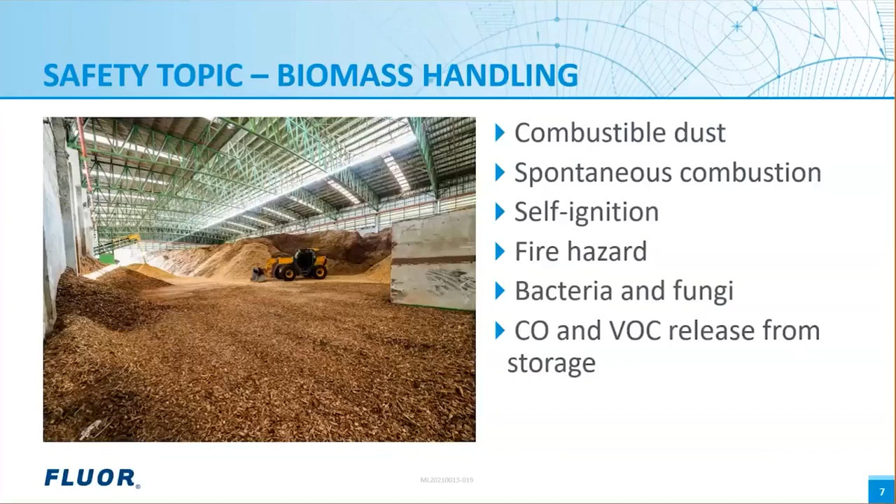Other safety concerns with biomass handling include the potential growth of bacteria and fungi on some types of biomass, and the release of VOCs when the biomass is stored, which all present health and safety hazards to any workers in the area. Proper air circulation is therefore extremely important. These safety concerns need to be kept in mind throughout the entire process of the biomass handling system design.

All right, moving on to our main presentation. We'll start our presentation today with a discussion of the need for biomass gasification, including the need for waste utilization and renewable fuels. We'll also look at how gasification compares to other processes, give a more in-depth look at types of gasifiers, and end with a look at considerations for the balance of plant design. I'll start with the need for waste utilization and renewable fuels.

However, before we get too far into details, I want to define some terms for anyone who is less familiar with gasification technology. Gasification, at the most basic level, is a process which converts carbon-based fuels into a vapor comprised mainly of hydrogen, carbon monoxide, and carbon dioxide. In biomass gasification, the feedstock can be any of a number of types of biomass, including municipal solid waste or MSW, refuse-derived fuels or RDF, wood products, or waste tires. The main vapor product from the gasifier is called synthesis gas, or syngas, and unlike combustion products, retains much of the heating value from the feedstock.

Syngas is then further processed and converted into useful products such as heat and power or chemicals, including hydrogen, methanol, and Fischer-Tropsch liquids. Before we get any further into the technical details of gasification and how it works, I want to first discuss why and when it is needed.

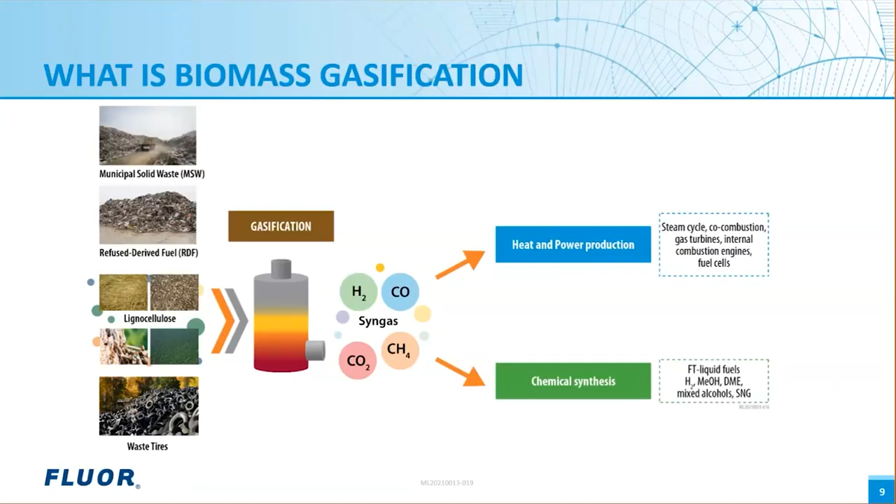The ability to utilize waste as a feed for gasification is important given the extremely high waste production rates worldwide. Global annual municipal solid waste production is currently at over 2 billion tons per year and is still growing, with a predicted waste production of 3.4 billion tons per year by 2050.

Waste production varies significantly across the world, ranging from about 0.1 to 4.5 kilograms per person per day. Highly urbanized countries generally produce more municipal waste. The map on the left shows a breakdown of the estimated waste generation per person, with countries in orange like the United States, Canada, and Australia having the highest waste production on a per capita basis.

In addition to municipal waste generation, other types of waste are also produced in large quantities. For example, industrial waste is at a global average of nearly 13 kilograms per capita per day. Agricultural waste accounts for another 3 kilograms per capita per day, and construction and demolition waste for another 1.7 kilograms per capita per day.

All of this waste has to go somewhere, and unfortunately, about 70% worldwide, on average, currently goes to landfills or open dumps. While recycling and composting are becoming more common, they still only account for less than 20% of waste treatment.

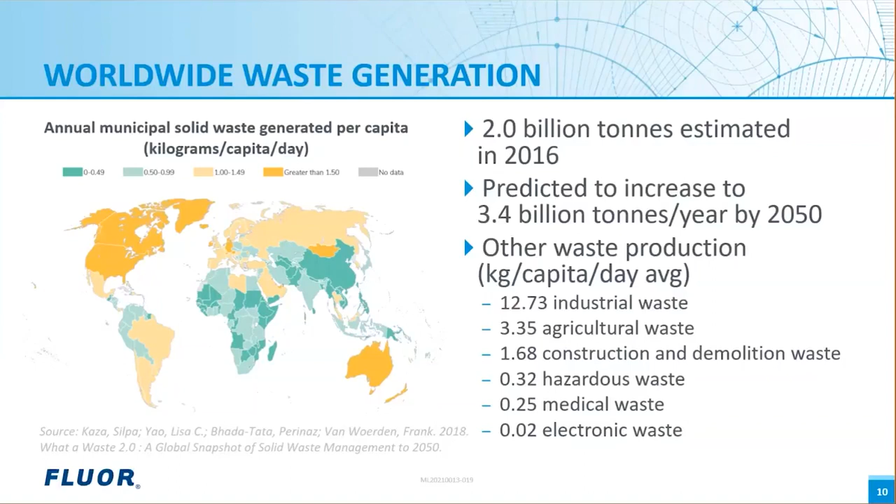Let's look at the United States in particular as an example of waste generation. In the United States, total MSW generation, which is shown on the graph on the left, was just under 300 million tons in 2018. Of that, about half was sent to landfills, and the amount to landfills is shown on the right.

Many current conservation efforts are focused on increasing recycling and reuse. The increase in recycling is what has allowed the total landfill tonnage to remain fairly stagnant while the total MSW production grows. However, at 150 million tons per year, there is still plenty of waste going to landfills, and there is clearly a need for additional waste utilization beyond recycling.

Gasification can help fill this gap. In addition to being a waste of resources, literally, landfill usage is also a concern because the amount of MSW produced in the United States is high enough that some regional landfills are filling up. Because space is often at a premium, other landfills charge a fee, called a tipping fee, to deposit waste there.

When other uses, like biomass gasification, are found for the waste, this tipping fee is often available as a revenue stream or saved cost.

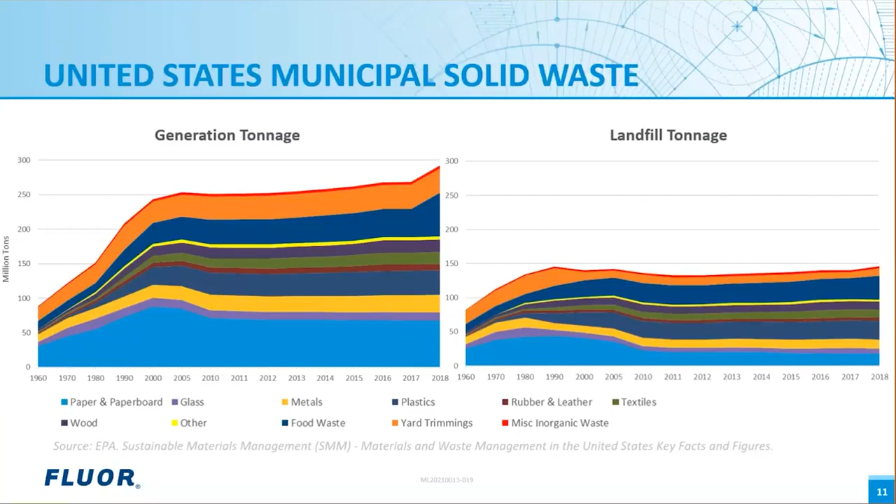The other major concern with sending waste to landfills is the resulting emissions. As MSW decomposes, it emits significant amounts of methane, which, on a pound-for-pound basis, has an impact 25 times that of CO2. In 2018, U.S. landfill emissions were equivalent to more than 110 million metric tons of CO2.

To put that in perspective, that's equivalent to the greenhouse gas emissions that would come from 20 million passenger vehicles over just 1 year. This puts MSW emissions in the United States as the third largest source of human-related methane emissions.

In addition, as you can see from the map, as you'd likely expect, the most significant landfill emissions are in areas with the highest urbanization. These are also generally the same areas that have other air quality and pollution concerns already.

To combat greenhouse gas emissions and pollution, many U.S. states and other countries have enacted limits on CO2 or methane emissions. Many places use a cap-and-trade system, which limits CO2 emissions while effectively putting a value on saved emissions. Utilizing waste as a feed for gasification that is otherwise destined for the landfill may qualify for these or other credits, particularly when carbon capture is employed in addition to gasification.

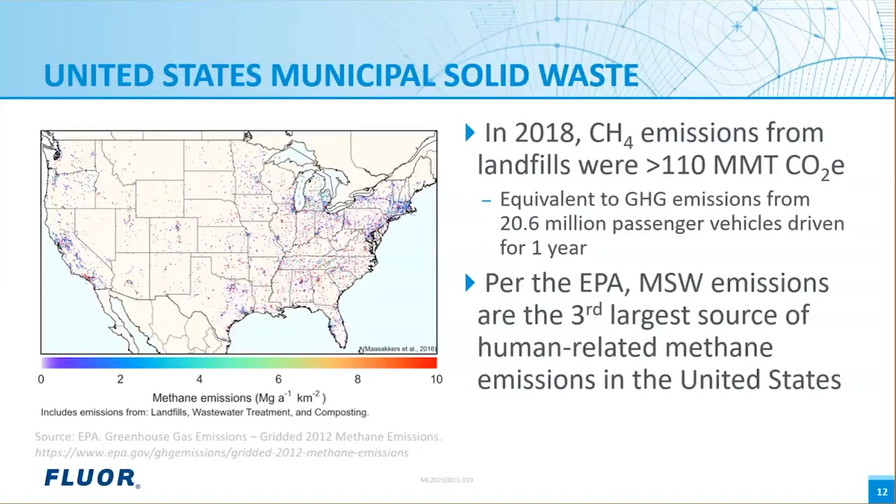Clearly, biomass gasification is useful because the feed can be waste streams that would otherwise be discarded. On the product side, biomass gasification can also provide significant benefits since the products can be considered green or renewable, depending on the feedstock and plant location.

If the product is a fuel, such as hydrogen, Fischer-Tropsch liquids, or even electricity, it can be classified as a renewable fuel. This is valuable for two reasons. It helps meet local renewable energy goals by producing low carbon intensity products, and it helps the project because additional revenue streams in the form of credits are often available.

Renewable and green products are particularly valuable in places like California that have high targets for renewable fuel and electricity generation. California has a goal of 60% renewable energy on their grid by 2030 and 100% by 2045. To put that in perspective, currently only about a third of the electricity in California is from renewable energy, about 6% of which is from biomass.

On the fuel side, California has announced that all new passenger cars sold in the state should be zero emissions vehicles, such as those run on hydrogen or electricity, by 2035. And although California already has a significant renewable energy infrastructure, there's still a ways to go to meet these targets.

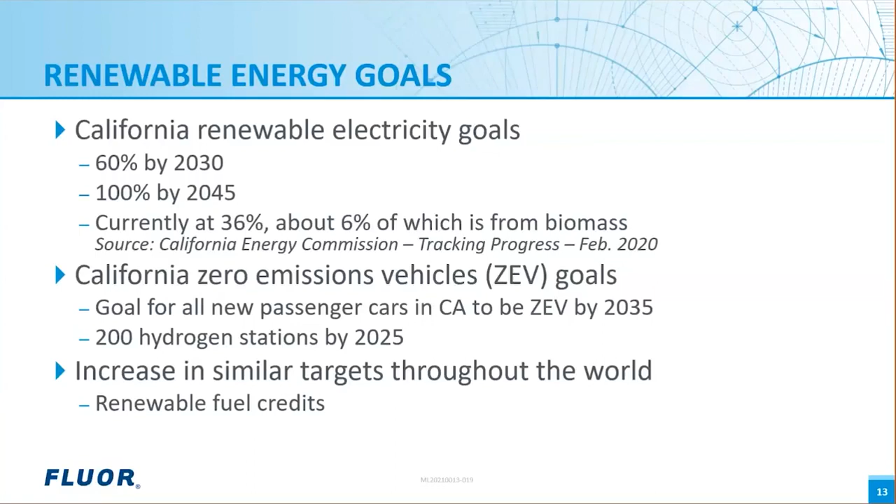Biomass gasification can help be a part of that puzzle. While California's goals are currently more ambitious than those in many other locations, we believe California is at the front of the curve and serves as a model of the future. It's expected that more and more places will follow with renewable energy goals of their own, which will further drive the need for solutions like biomass gasification worldwide.

Based on all of these trends, there's a few major scenarios where biomass gasification can be a particularly effective tool. For example, gasification is beneficial where there are large quantities of biomass available. This might be near a landfill, and if the landfill has tipping fees available for diverted waste, the economics of the project can be further improved.

Areas with other sources of biomass should also be considered, such as in a region with a lot of agricultural waste or near a forest with forest floor cleanup required. Transportation costs must also be considered. Due to the relatively low energy density of biomass, transporting biomass feedstocks over long distances can quickly become cost prohibitive. So the location of the gasification plant is important.

And as previously discussed, biomass gasification can be a good solution in areas where producing hydrogen or other fuels with low carbon intensity is particularly important.

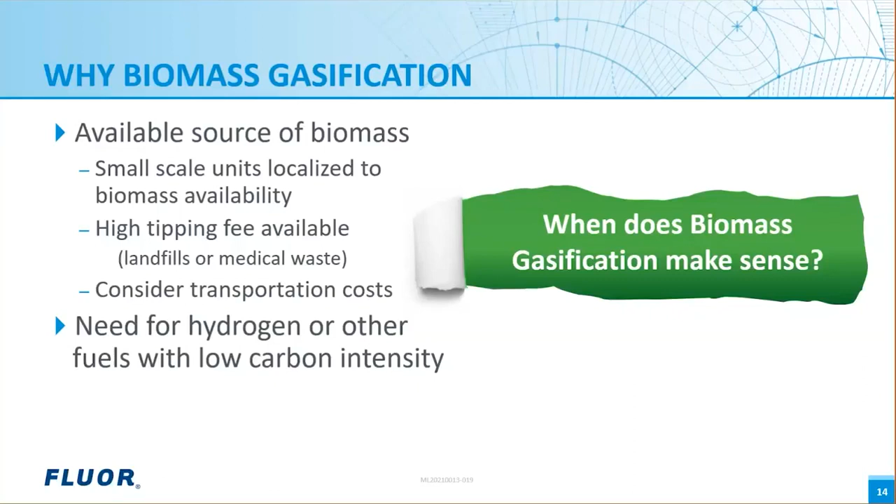Let's take a quick look at the carbon intensity of hydrogen production to see how biomass gasification compares with other methods of production. Carbon intensity is calculated by considering all greenhouse gas emissions from the fuel production process, including feedstock emissions and end-use emissions. It also considers saved emissions from the feedstock's original purpose. Carbon intensity is reported on the basis of grams CO2 equivalent per megajoule of fuel.

Hydrogen produced via traditional steam methane reforming has a carbon intensity of about 120. Hydrogen produced with electrolysis using the average California 2020 grid electricity has a carbon intensity of about 147. Hydrogen produced via electrolysis from wind or solar power has a much lower carbon intensity, around 11. Hydrogen produced from biomass gasification without carbon capture falls somewhere in between, with a carbon intensity of around 45.

When carbon capture is added, the carbon intensity with biomass gasification can drop below zero, since there is now a net reduction in emissions to the atmosphere, for example, by reducing the landfill emissions. Note that the actual carbon intensity can vary significantly based on the type of biomass and plant configuration.

Having a low carbon intensity product is always desirable, but it can also particularly benefit the project when it aids in qualification for any renewable fuel credits that are available in the area.

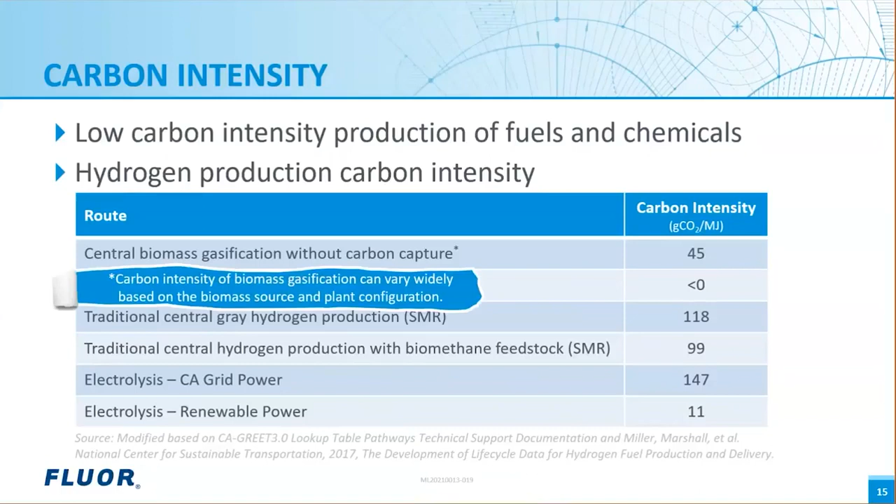I'd now like to return to a description of the biomass gasification process and look at how it works and what it can be used for in a little more detail.

Although biomass gasification is a quickly expanding area, gasification in general has been around for a century and is frequently used with coal and petcoke as feedstocks. As mentioned at the start of the presentation, gasification converts solid fuels to syngas.

The process can be broken down into three major, often overlapping steps: drying and preheating, pyrolysis, or the decomposition of the feedstock, and the gasification step, with heat often provided by combustion. The gasifier itself generally operates at high temperatures and above atmospheric pressures. An oxidant such as oxygen or air and/or steam is also required.

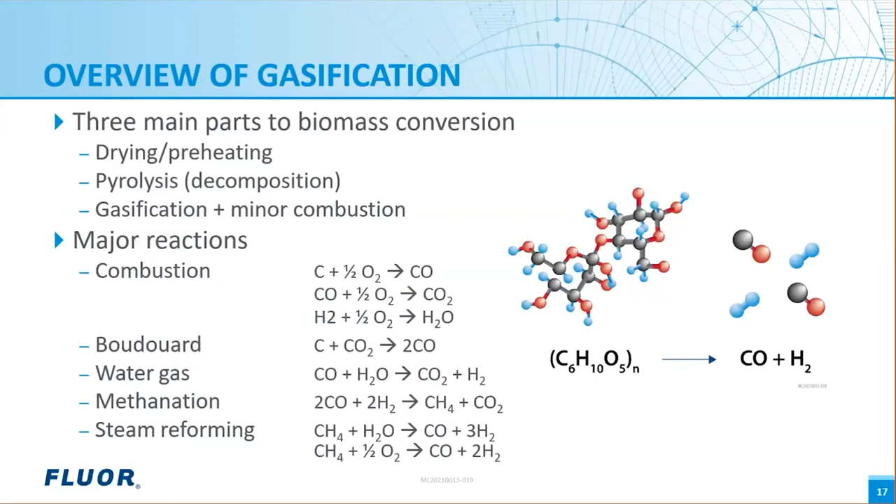While I've mainly discussed MSW as a feed so far, biomass gasification can utilize a variety of sources as feedstock. Biomass is divided into two main categories: primary and secondary biomass. Primary biomass includes forest biomass, agricultural crops, and plant residues. Forest biomass in particular can be a great feed for gasification in areas like California that have a high focus on forest residue removal as a method of fire prevention.

Secondary biomass comes from conversion of other organic material. MSW falls into this category, as does demolition wood, food waste, and sludge and sewage, all of which can be considered for gasification.

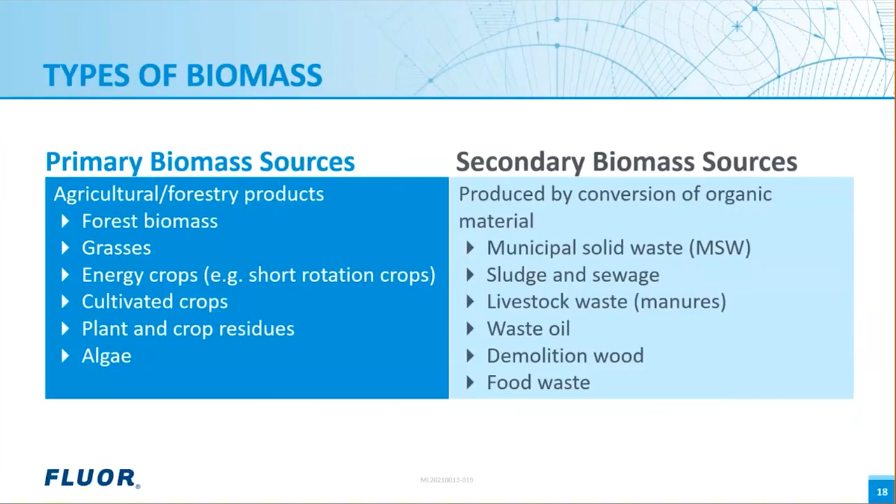On the product side, a wide range of chemicals and fuels can be considered based on what is most advantageous at the time for the specific plant. Syngas can be directly used to produce heat in the form of hot water, steam, or electricity. It can alternatively be further processed to make Fischer-Tropsch liquids, which includes naphtha, diesel, jet fuel, and wax, or other chemicals such as hydrogen, synthetic natural gas (SNG), methanol, ammonia, or other chemicals.

In addition, gasification plants often have other byproducts which can be sold, including argon, nitrogen, and oxygen from the air separation unit, carbon dioxide, and sulfur or sulfuric acid. Many gasification plants will produce more than one of these products. Syngas is advantageous precisely because it can be used for so many end products, and the plant configuration can be selected based on what is most needed or most profitable.

So let's look at the relative prices of some of these products.

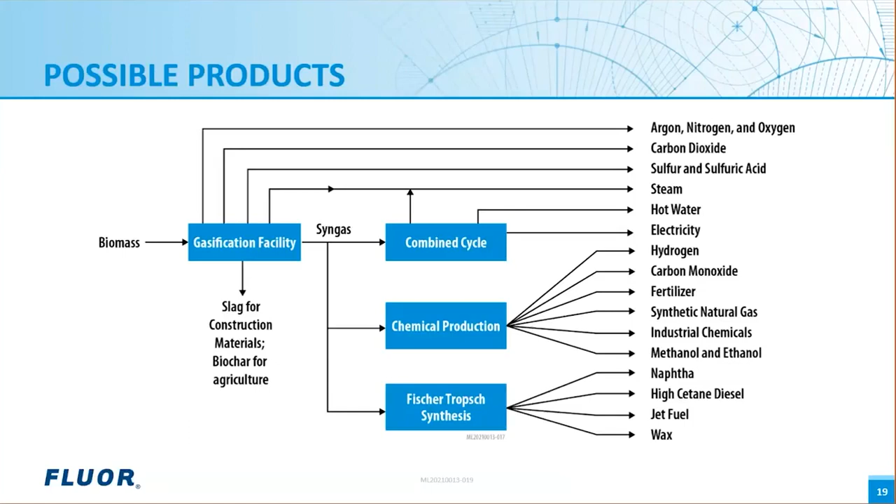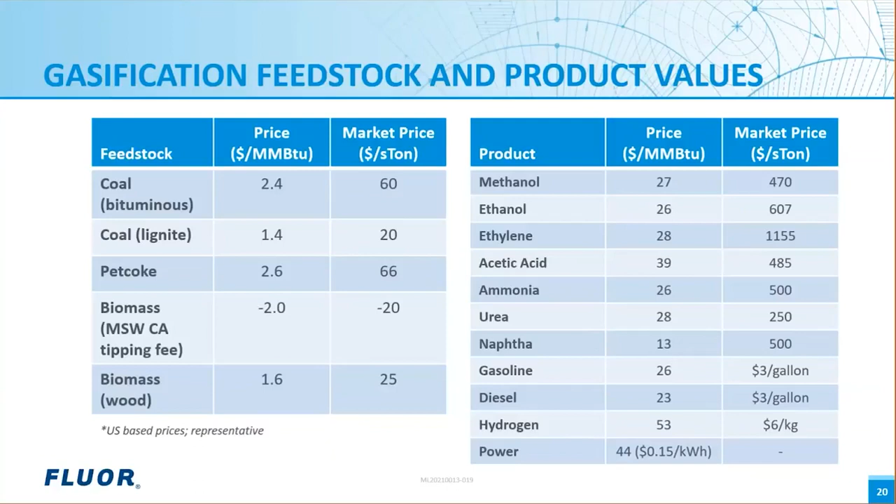If you're familiar with biomass conversion processes other than gasification, you might have noticed that many of the gasification features I've discussed overlap with other processes. I'll now explain how gasification differs.

One of the more common usages for biomass is to combust it in a power plant. Although several of the reactions are overlapping, gasification differs from combustion in several key ways, and therefore has different uses. The products of gasification retain their heating value, unlike combustion. For example, in gasification, carbon is mostly converted to carbon monoxide instead of carbon dioxide in combustion, and hydrogen is primarily converted to H2 instead of water. Because biomass gasification retains the useful heating value of the feedstock, it can be used to produce fuels and products other than power. There is also no excess oxygen in gasification, unlike combustion.

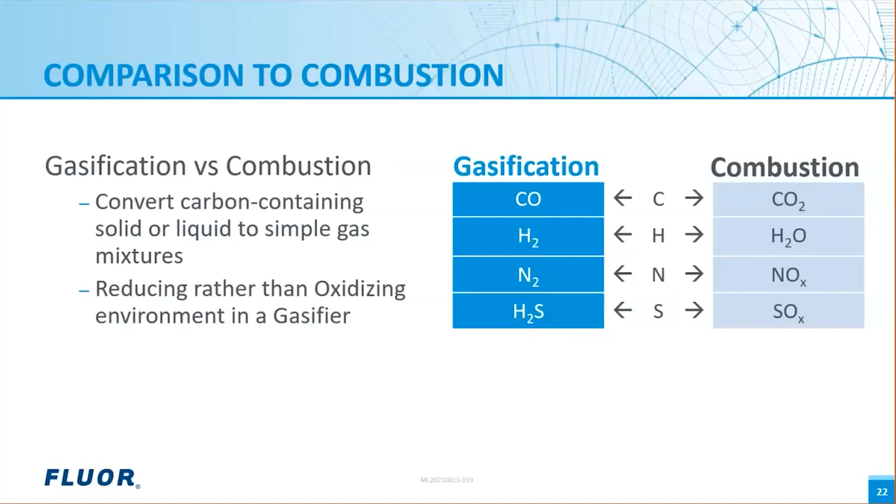Gasification takes place at the highest temperatures of any of these processes besides combustion, and is the only one to produce syngas as the main product.

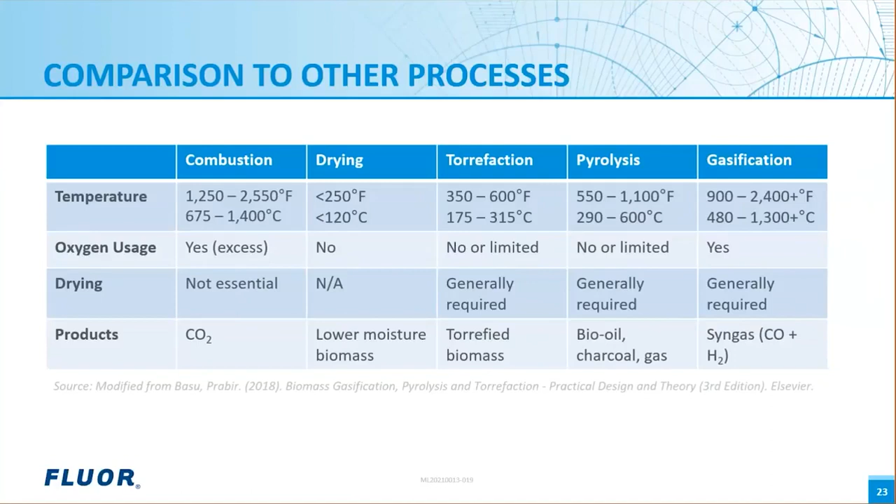I'll now hand it over to Sanjiv to talk about types of gasifiers.

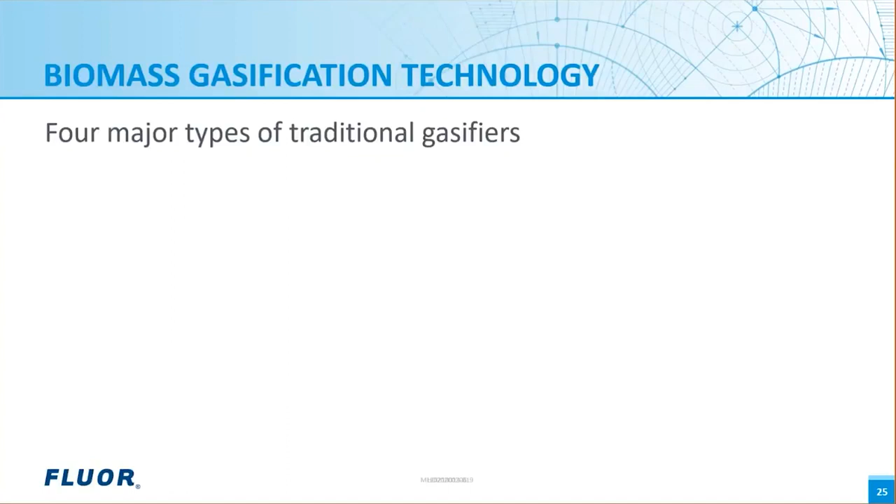Thank you, Katie. Now that you are all familiar with the various terminologies of biomass and gasification, I would like to walk you through some of the gasifier types. The first type, the moving bed, also known as a fixed bed gasifier, has been here for a very long time—these gasifiers were used in the 1800s. A moving bed gasifier is characterized by a bed in which the solid feed moves slowly downward under gravity as it is gasified. The next one, the entrained flow gasifier, is the most successful and widely used type of gasifier for large-scale gasification. The feed can be liquid or a slurry of solid and liquid fuels.

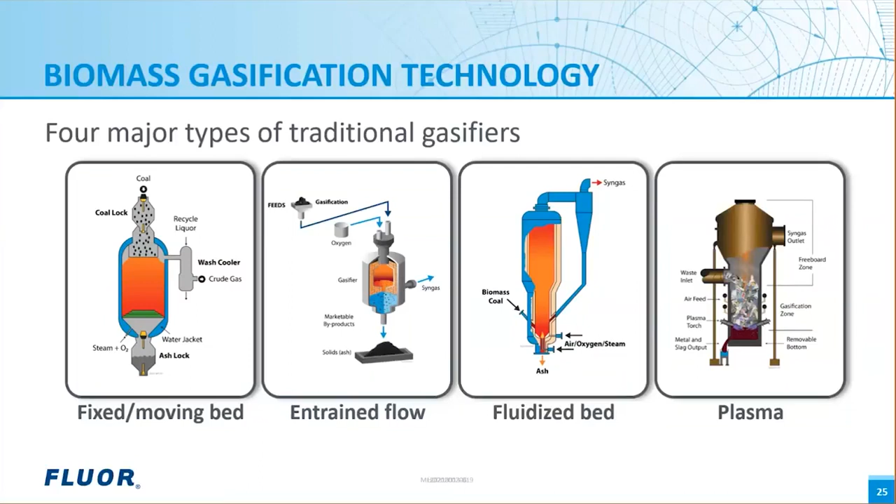The next one is the fluidized bed gasifier. It is based on the fundamental principle of fluidization—in such a gasifier, the fuel, together with the inert bed material, behaves like a fluid. Lastly, the plasma gasifiers. In a plasma gasifier, an electric arc is used to create a plasma. The feedstock can be any material with a carbon source and is gasified at very high temperatures.

Before I take a deep dive into the various types of gasifiers, let us look at the differences in the properties of biomass versus traditional gasifier feedstock.

As one can see in this table, biomass is a very low energy feedstock, with typical heating value of around 4,000 to 8,000 BTU per pound, as compared to coal, which typically has anything from 13,000 to 15,000 BTU per pound. So one needs to process a lot more tonnage of biomass feedstock for the same equivalent syngas production.

Biomass can also have very high moisture content, anything from 10 to 60%, whereas it is more common to see 5 to 12% in typical coal. Typical moisture content for gasification feed is around 10 to 15%. So as you can see, if you have a biomass feedstock, it is often required to have a drying step before it is fed to the gasifier.

Although the table shows very low ash content for biomass, ash content for some biomass feed, such as straws and husk, can be much higher, even up to 15 to 20%. Sulfur content tends to be very low for biomass compared to coal or pet coke. Other component that one is typically interested in defining a gasification feedstock is chloride.

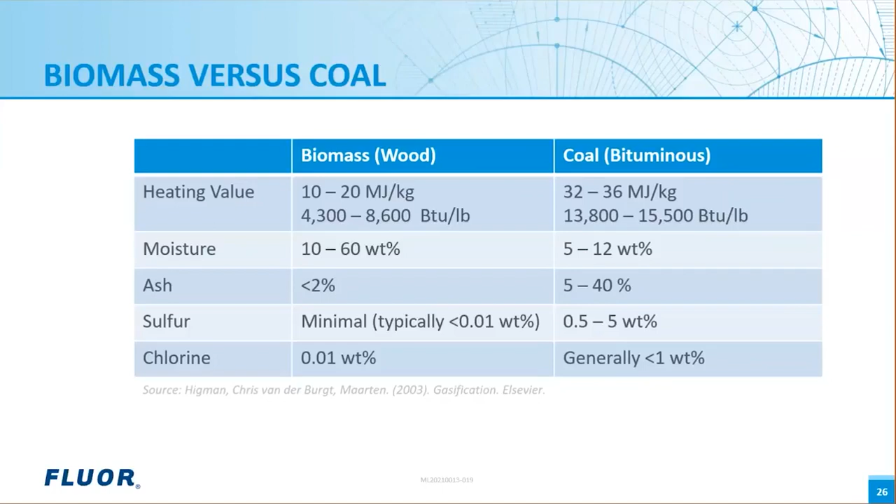Okay, so let's get back to the working of the various gasifiers. In the moving bed gasifiers, the solid feed moves slowly downward with gravity as it is gasified, and the syngas generated moves in a countercurrent to the feed.

In such a countercurrent arrangement, the hot syngas from the gasification zone is used to preheat and pyrolyze the downward flowing solids. Pyrolysis, char gasification, combustion, and ash melting occur sequentially.

This arrangement reduces the oxygen consumption. The outlet temperature of the syngas is generally low, anything between 850 to 1200, although higher temperatures are reached in the heart of the bed itself. As a result of the low syngas outlet temperature, a relatively large amount of methane and tars are produced.

Moving bed processes operate on lump material. If an excessive amount of fines is present in the feed, it tends to be entrained with the exiting syngas and can block the syngas flow paths. Examples of moving bed gasifiers are Lurgi dry bottom gasifier and British Gas Lurgi slagging gasifier.

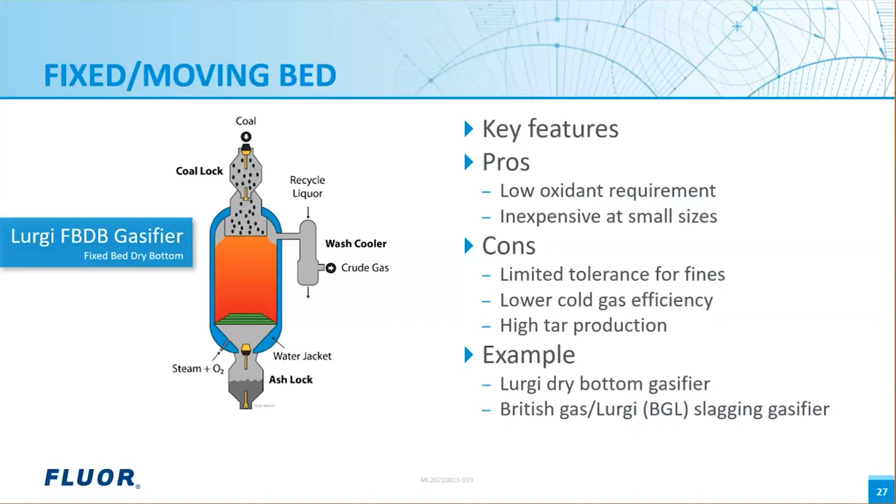So the next one, entrained flow gasifier. It is the most successful and widely used type of gasifier for large-scale gasification. The feed can be liquid or a slurry of solid and liquid fuels. They are injected through a burner or a mixer together with oxygen as a gasification agent.

The gasification temperatures are between 2200 to 2900 degrees F, and the operation can be anything from atmospheric pressure to over 1,000 pounds. The residence time of these gasifiers is very short, usually only a few seconds. With high operational temperature, tar production is minimized. The short residence time can also be a disadvantage, as it requires very fine grinding of the feed.

Now, grinding fibrous biomass into such fine particles is very difficult. Additionally, entrained flow gasifiers need ash to be molten. For biomass with high calcium and low alkali metals, such as sodium or potassium, the ash melting point is high, and therefore to provide for such high combustion temperature, a high amount of oxygen is required.

Molten biomass ash is also very aggressive, which greatly shortens the life of the gasifier's refractory lining. For this reason, entrained flow gas reactors are not preferred for biomass gasification. Examples of entrained flow gasifiers are GE, E-gas, MHI, Shell, and ECUST.

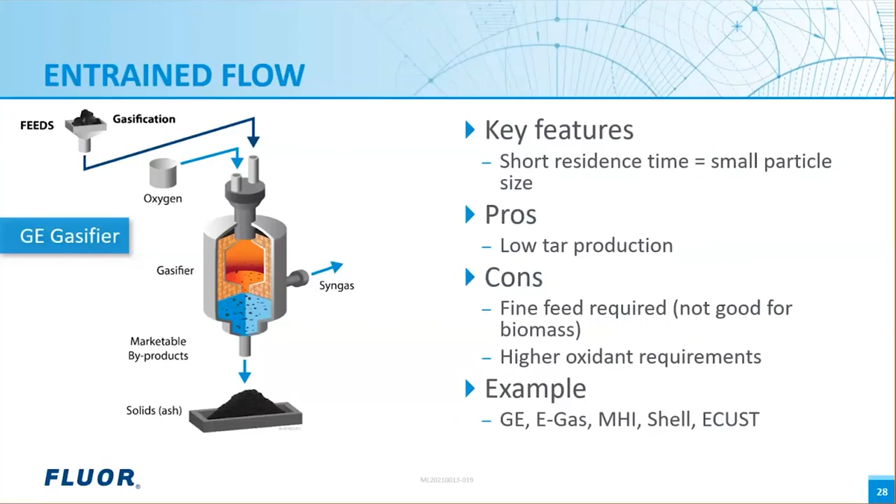So the next one I want to talk about is the fluidized gasifier. It is based on the fundamental principle of fluidization. In such a gasifier, the fuel together with an inert bed material behaves like a fluid. This behavior is obtained by forcing a gas, the fluidization medium, through the solid inventory of the reactor.

Air, steam, or steam and oxygen mixtures are examples of commonly used fluidization media. Silica sand is the most commonly used bed material.

Circulating fluidized beds operate at high gas velocities, typically anything from 9 to 30 feet per second, dragging the solid particle upwards with the gas flow. These particles are separated from the gas in the cyclone and recycled back to the bottom of the fluidized bed.

Because fluidized bed gasifiers would plug if ash were to melt, the bed temperature must be below the ash melting or slagging temperature. Hence, the maximum operating temperature is limited by the melting point of the ash, and typically lies between 1400 to 1800 degrees F.

These gasifiers have a better tolerance for fines and have a very high cold gas efficiency. They also have a very long residence time, which makes them a good candidate for biomass. As in any fluidized bed, the particle size of the feed is very important, and therefore sizing of your feedstock is paramount.

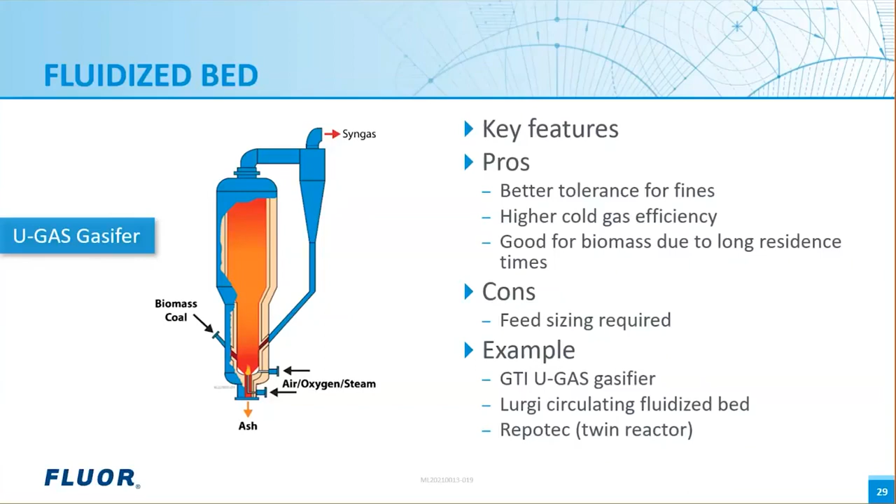So the next one is the plasma gasifier. Plasma is just very high temperature thermal energy. It is sometimes referred to as the fourth state of matter, in addition to the commonly known phases that everybody is familiar with: solid, liquid, and gas.

In a plasma gasifier, an electric arc is used to create plasma. A temperature of up to 9,000 degrees F is created at the torch. The high temperature experienced in a plasma gasifier, of up to 5,500 degrees F, ensures complete destruction of the feedstock.

This allows for the processing of high moisture feedstock, or even feedstock that contains very high levels of inert materials like glass and metals. It is insensitive to the quality of feedstock due to the high temperature. Therefore, very little pre-processing of the feedstock is required.

The syngas exits the gasifier at around 1800 degrees F. The higher temperatures inside the plasma gasifier result in the complete destruction of tars and have very negligible methane in the syngas. The inorganic components of your feedstock, like glass, metal, and concrete, are melted inside the reactor and flow out of the bottom as a non-toxic vitrified molten slag, which can be used safely as aggregate.

The slag flows out of the gasifier at up to 3000 degrees F and is typically removed by quenching with water. Of course, the aggressive temperature requires high electricity usage and reduces the material life. Plasma gasifiers are very well suited for MSW and any solid waste, including hazardous waste. Typical examples of plasma gasifiers are the Solena gasifiers and the Westinghouse Alter NRG one.

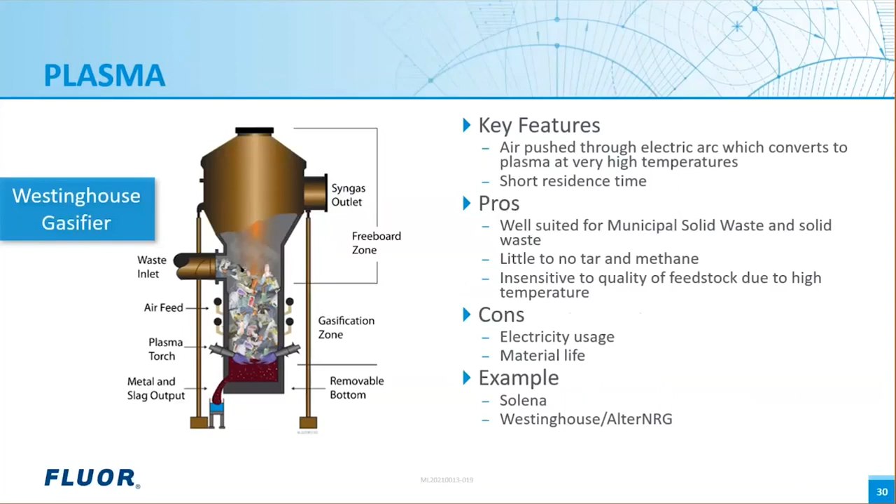So, in summary, looking at the various types of gasifiers, one can see that the fluidized bed and the plasma gasifiers are the most suitable for biomass gasification. Of course, there are some variations to these four main types of gasifiers, and one can use a combination of them in developing a plant for yourself. Of note is that these technologies have been out there for a while and will not necessarily be considered first of a kind when developing a project.

This also comes up very often when we're dealing with client screening, because if you're building a first of a kind, financing is always a big issue.

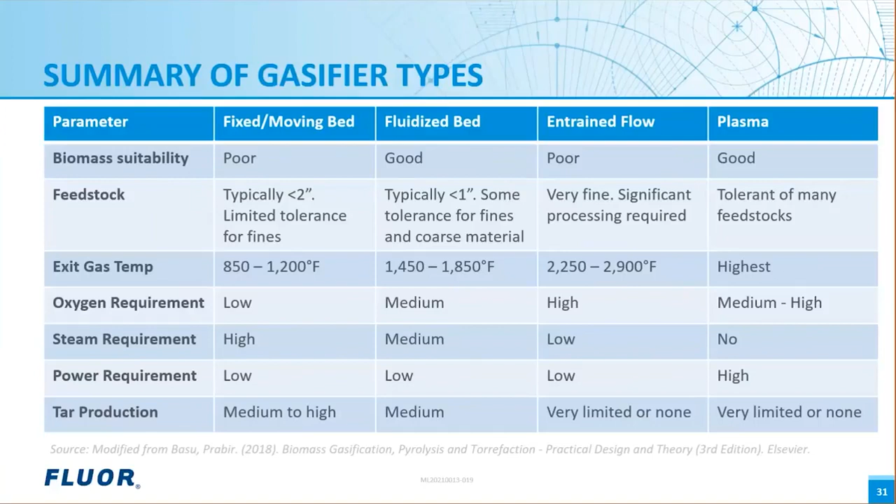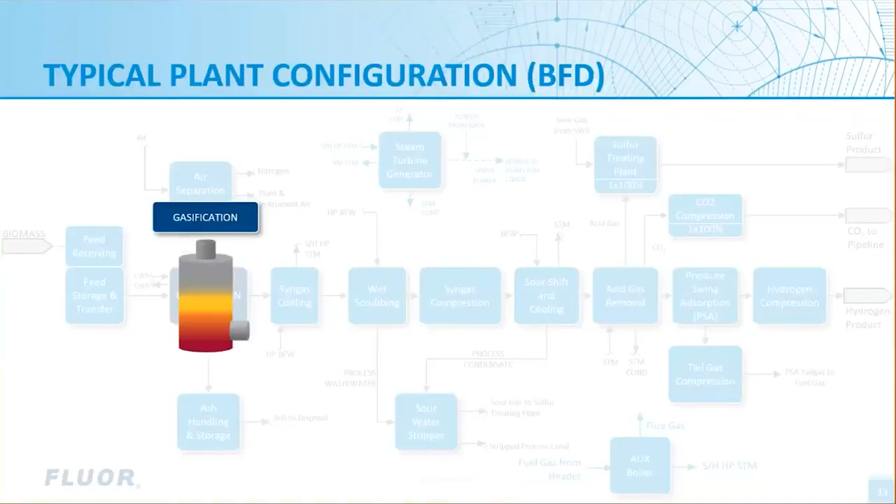So next, I want to walk you through what a typical plant configuration looks like. In addition to the gasifier itself, a biomass gasification plant needs to have a significant number of supporting units and infrastructure. The diagram on the screen shows a potential configuration for a biomass gasification plant for hydrogen production with carbon capture. The flow sheet is typically customized based on the feedstock, technology, and final products.

The front end of the plant will typically have feed receiving, storage, and transfer units. Depending on the type of feedstock and gasifier selected, it may also include sorting, screening, grinding, and drying steps. As discussed earlier, the gasifier being used has a big influence on the type of feed preparation required at the front end.

Next, to support the gasification process, the plant will typically have an air separation unit, or ASU. Depending on the size, it can be either a cryogenic unit or a VPSA. The VPSA is just a vacuum pressure swing adsorption unit.

We have discussed the gasifier itself earlier, but irrespective of the selection, it will have a slag and ash handling system. Typically, the slag or ash are sent for disposal offsite.

As discussed earlier, the syngas leaves the gasifier at very high temperatures. So the syngas is cooled by generating various levels of steam and then scrubbed to remove any particles, carryover, and trace components such as chloride.

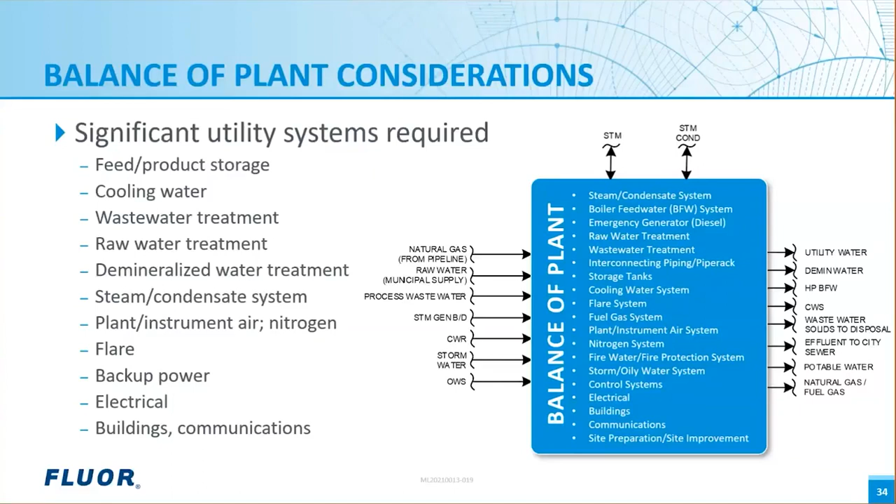So quite an infrastructure behind it, again, compared to your electrolysis, but nothing new if you are in the oil and gas business.

In developing the flow sheet for a biomass gasification plant, one needs to be aware of the various design considerations. Understanding the challenges associated with biomass is critical. The morphology of the feedstock is important in defining the feedstock preparations such as grinding, drying, and feeding.

Syngas cleanup depends on the final product one is targeting. For example, if you're just making power, it requires much less cleaning versus if you're making chemicals, which typically have very sensitive catalysts that can get very easily poisoned by any trace components or contaminants.

One needs to also have a very deep understanding of the chemistry for modeling the whole process. This is important so that your design can cater for all upset conditions and also sizing of all your equipment, including material selection.

And remember, knowing those components also helps you define the balance of plant. Biomass with high alkali content needs to be carefully analyzed, as the ash could increase plugging and have excessive wear and tear on the refractory.

Tars, like I discussed earlier on, depending on the gasifiers you're using, can cause a lot of fouling of your equipment and should be handled accordingly in the design.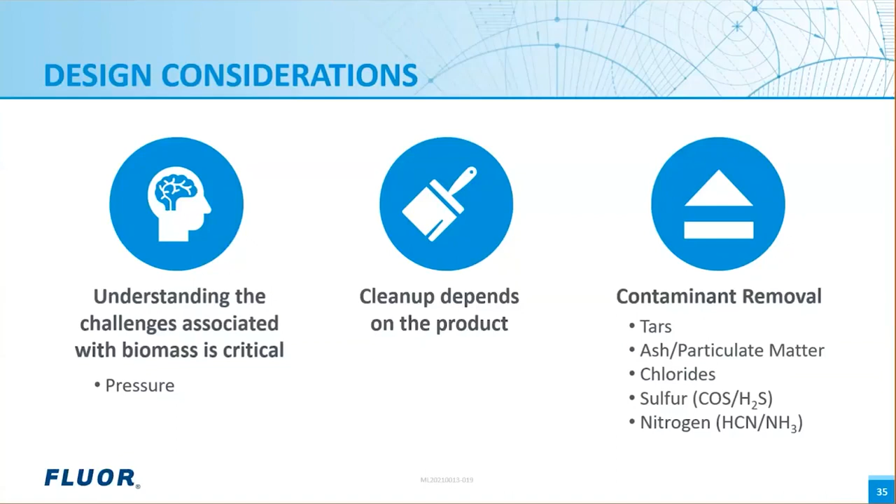Other miscellaneous considerations include the high gasifier operating temperature, which can require the use of refractory and can also lead to problems such as high temperature hydrogen attack or chloride stress corrosion cracking. Metallurgy must be carefully selected, taking into account the range of expected operating conditions, plus the composition of the syngas and the biomass. Regional biomass availability should also be considered, including, as previously mentioned, the transportation and collection costs, as these can be quite significant.

There are also some operational considerations to be aware of. Gasifiers typically require periodic maintenance. For example, the refractory of the gasifier has a limited life and will need to be inspected and replaced. In plasma gasification, the life of the torch will need to be evaluated. Maintenance requirements should be discussed with the gasification licensor, and for large plants that require high availability, we may want to consider spare gasifier trains.

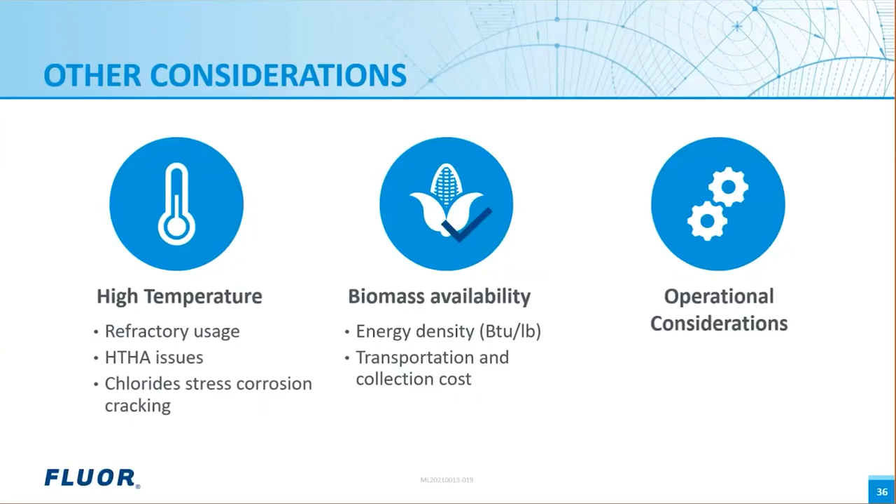Another consideration is the oxygen usage. Oxygen-blown gasifiers require significant amounts of generally very high purity oxygen. To make oxygen at the purity required, a cryogenic air separation unit, or ASU, is generally needed. ASUs are expensive and need to be fairly large to take advantage of economies of scale. They also have a significant operating cost due to the power required to operate the compressors in the unit. This electric power also correlates to an increased carbon footprint for the unit and consequently the plant.

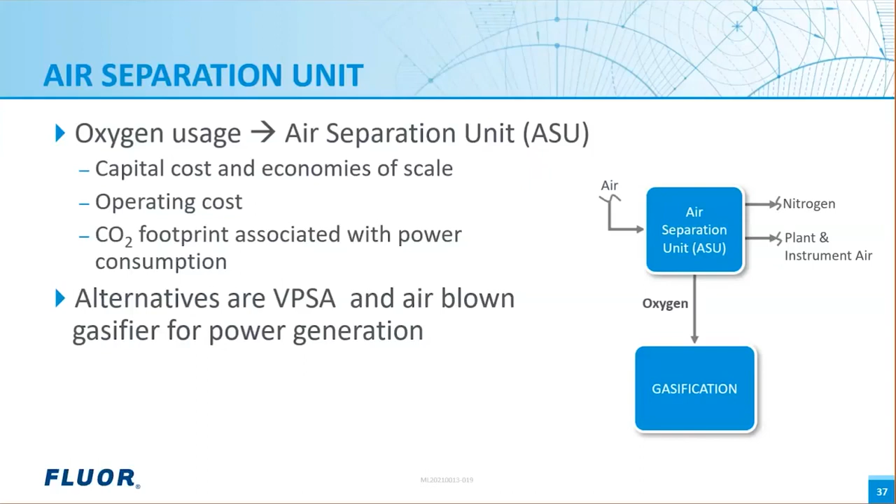To avoid using an ASU, vacuum pressure swing adsorption, or VPSA, units can be considered instead, although the oxygen produced will be at a lower purity. Alternatively, air-blown gasifiers can be used. However, with this configuration, the nitrogen in the air ends up in the syngas, diluting the heating value. If the syngas is used for anything other than power production, significantly more treatment is required to remove the nitrogen.

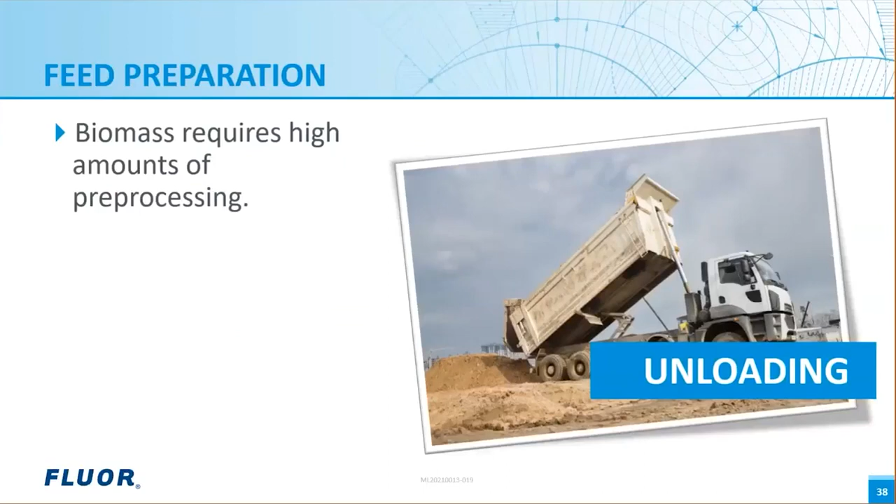Another unit which requires careful design thought is the feed preparation and handling unit. A high level of biomass pre-processing is required, due in part to the high moisture content and the fibrous structure of the biomass. The exact pre-processing configuration will depend on the type of biomass used and the specific gasifier requirements. However, in general, the steps required are: unloading, where biomass is often transported via truck to the site and then must be unloaded; screening, to remove any metals or other unwanted materials; and storage, which, due to the low density of biomass, can take up quite a significant amount of space.

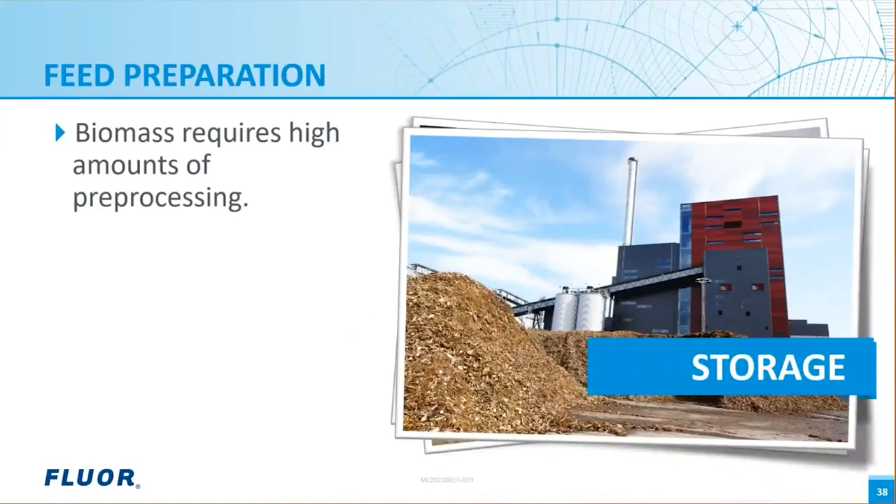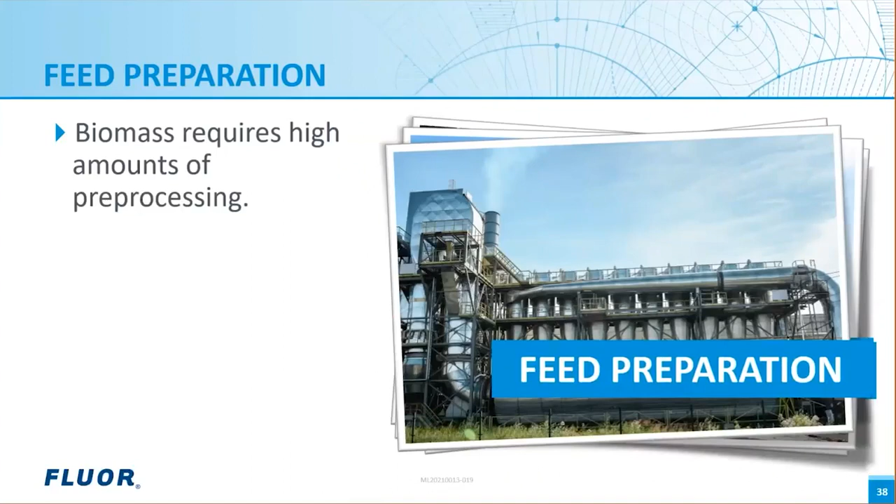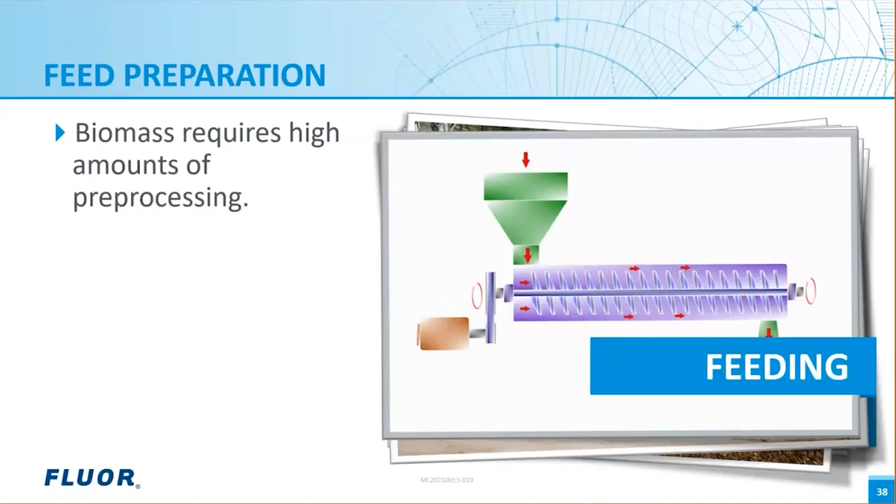Feed preparation, including sizing and drying — the exact specifications will depend on the gasifier type, and Sanjiv mentioned some of the typical requirements for each type. Intermediate storage of sized and dried biomass increases availability. Conveying moves material from one step to the next, and then finally feeding to the gasifier. The type of feeding system must be carefully considered since the gasifier normally operates at pressure. Types of feeding systems include belt, chute, rotary, screw, and gravity feeders, or pneumatic injection.

Feedstock variability across the seasons also needs to be considered in the design. Depending what biomass is used, there can be large swings in the biomass composition, which will lead to changes in the gasifier operation and syngas product. All of these considerations need to be kept in mind from the early stages of the project development to ensure that the plant is safe, efficient, and well designed.

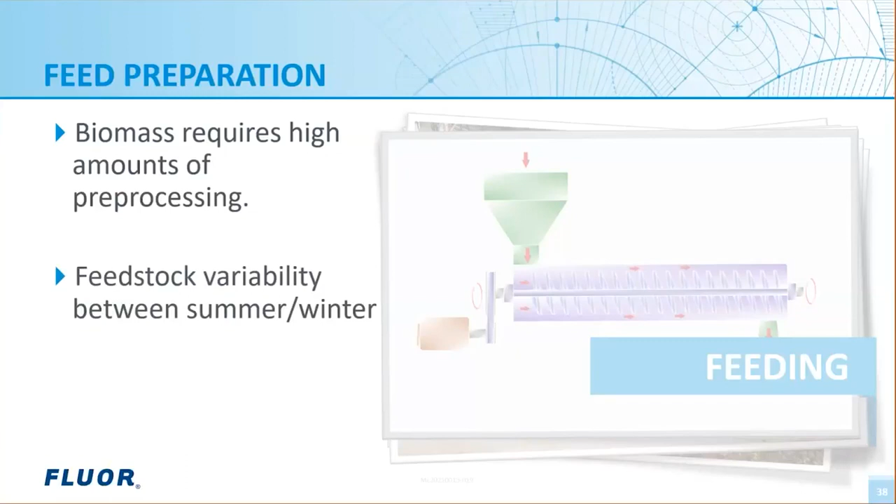There's a growing awareness today of the need for environmental responsibility, both on a personal and a corporate level. Many major companies are supporting reduced carbon emissions, waste reduction, and other green initiatives. We have seen similar trends on a political level, with incentives offered for green fuels and power and lower greenhouse gas emissions. Biomass gasification can help meet these goals, and with waste and other feedstocks readily available in many areas, it is an opportune time to do so.

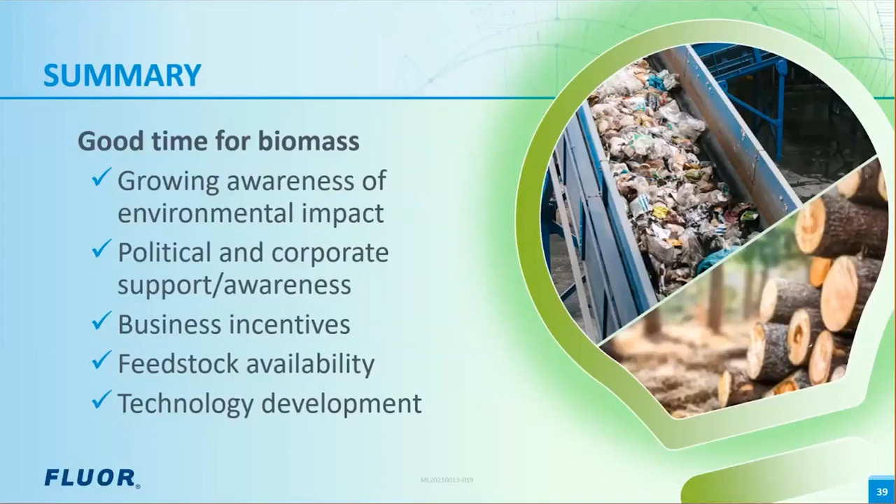Gasification is also a favorable option since it is a well-proven technology, unlike many other green alternatives. All of these factors support what we expect to be an expanding market for biomass gasification in the coming years. Thank you.

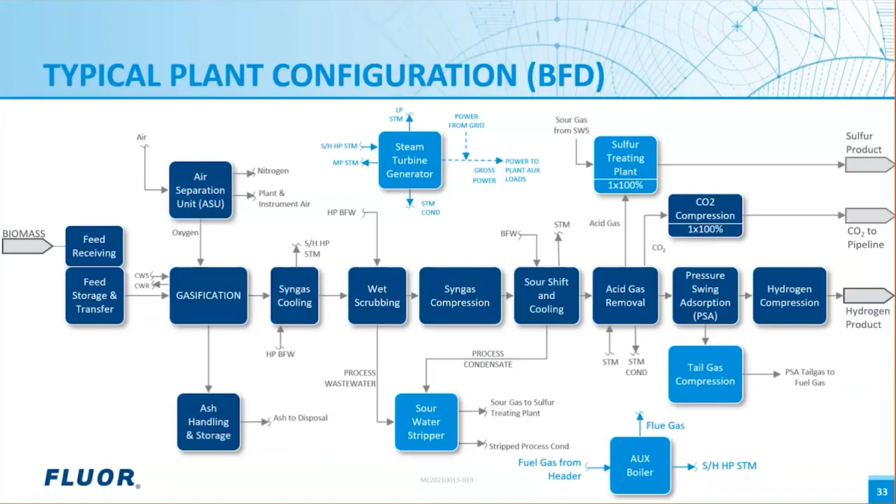Okay, thank you. The next question I'll direct to Sanjiv. Can Fluor share any biomass gasification projects that they are currently executing? What is Fluor's role in these projects? So we are involved with a number of biomass gasification projects, especially in this transition economy. But unfortunately, most of these clients are trying to get the fastest to market. So a lot of them are confidential, but people can see some of whatever has been announced in the public media. I would just say we're working on a number of them, but I can't disclose any of them.

Okay, thank you. The next one I'll direct to Katie. What is the rough capacity of a typical biomass plant? Presumably these are small scale facilities. Good question. So these are often smaller in scale compared to your typical coal or petcoke gasification plants. If you're looking at a single train of a biomass gasifier, it depends on what type of gasifier you're looking at, but it would be anywhere from maybe 100 tons to 1,000 tons per day of feedstock. And then, of course, if you are looking for a larger scale, you can combine multiple trains of gasifiers together.

Okay, thank you. The next question, I'll direct to Sanjiv and or Katie. What standards would you refer to while designing a biomass gasification facility, especially for emissions and for flare design? So, like I discussed early on with the flow sheeting, your biomass gasification will fall typically under, it's more like a petrochemical complex rather than an electrolysis. So whatever standard you apply, whether API or for flare, like 521 and things like that, that you apply for oil and gas facilities, it will be very similar.